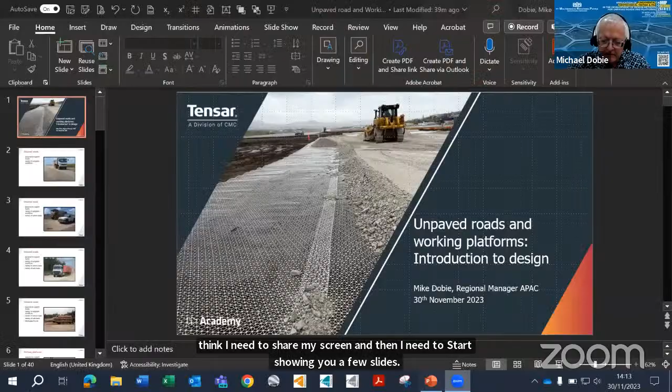I think I need to share my screen, and then I need to start showing you a few slides. So here we go. Good, I think everybody should be able to see this now, and I hope you can all hear me.

The topic today is unpaved roads and working platforms. These sound like they're quite similar, but of course, in terms of the way we design them and the way we regard them, there are quite big differences as well. So the question of design is an important one, and you've already heard from Rifa that my colleague Andrew Lees has been involved in developing new design methods, but I thought it would be a good idea just to introduce these particular forms of structure because they are quite special.

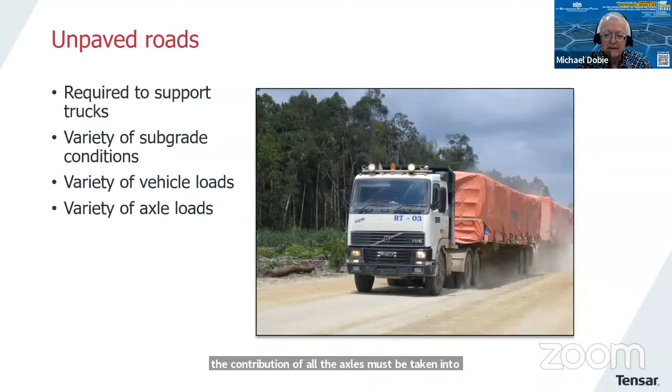So let's just have a look at a few unpaved roads. I think we all know what they are. They are roads built generally from gravels or aggregate materials, and they normally support trucks. Of course, they can support other loads as well. They can be built for a variety of subgrade conditions and also a variety of vehicle loads, from large trucks down to very small ones, and also a variety of axle loads. Here is a very long vehicle, so it has many axles, and the contribution of all the axles must be taken into account. A quite common problem here in Indonesia, of course, is overloaded trucks. I think there's one that is hugely overloaded with a lot of tree trunks on the back of it. So something else we need to think about in our designs.

Then working platforms, these are generally being designed to support various loads on a construction site. They're often considered to be temporary structures, but sometimes they do have to provide a function for much longer than that. And of course, they can be designed for a variety of subgrade conditions and also a variety of plant loads. You can see there an image where we have some piling rigs on a working platform in Germany. And here we have another picture of a particularly huge crane that's being supported also on a working platform. And this one, you can see how big the tracks are, but this is applying a pressure of 500 kilopascals maximum. So an absolutely massive load.

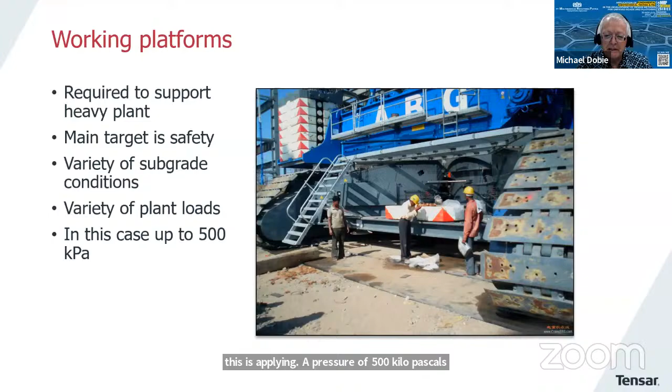To help provide information about both of these forms of design, Multibangun organized two design workshops. One, about three months ago, was for the design of unpaved roads. And then just two days ago, we had another workshop looking at the design of working platforms.

What I promised during both of these events was that the design methods, which I described briefly, would be explained in more detail. I was keen to get my colleague Andrew Lees to spend some time in a workshop, but sadly he can't come all the way from Cyprus today, so it's a webinar instead, and I'll ask Andrew to explain the background to the design methods we were using.

But before I ask Andrew to talk, I'd like to make a few points about some aspects of designing both forms of structure. First of all, what are we trying to achieve?

When it comes to an unpaved road, the load comes from a wheel and a certain number of passes of that wheel. There'll be a subgrade of some sort, an aggregate layer, and our target is to find out what the thickness of the layer is. We need this minimum thickness to provide the required design life.

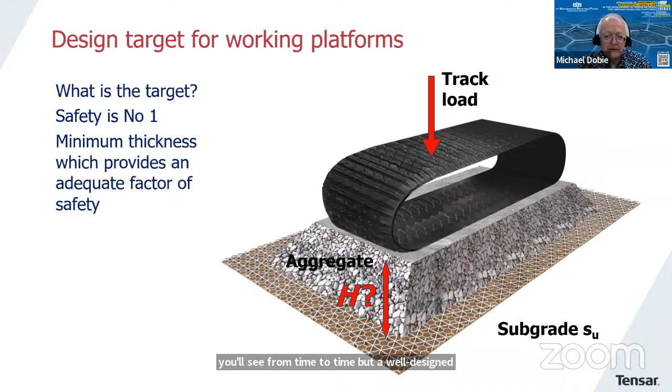But the targets are a bit different when it comes to working platforms. In fact, the number one target is safety — we need to make sure these bits of equipment don't fall over. Sadly, there are many reports of this happening from time to time, but a well-designed working platform is vital. So our target is to find the minimum thickness that still provides an adequate factor of safety.

So for any particular subgrade, we might need to design some form of access road for trucks, which would generally have a target given by a rut depth to be achieved. That might lead on to a working platform for a heavy crane, where the performance target would be to achieve a certain minimum safety factor. These are all part of the input into the design methods.

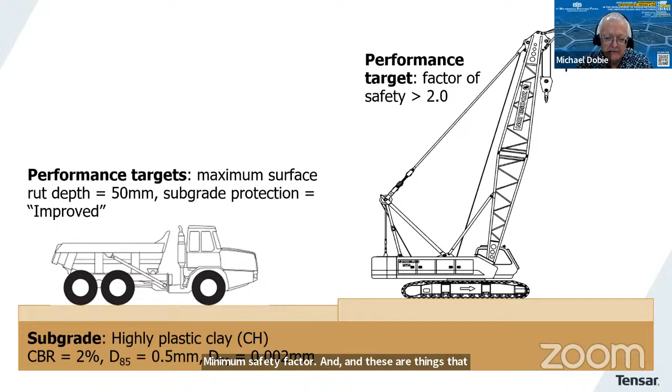During our workshops, we provided participants with examples which they designed themselves using our new software platform called Tensar Plus, which I'll show you briefly. You can see from the images, which are the same as the previous ones — in the first, three months ago, we designed an unpaved road, and in the second, just two days ago, we designed a working platform for a crane.

Here are the design methods — this one is called the Lees-Hahn method, also referred to as LARMS. I'll ask Andrew to explain further on that terminology. The platform was designed using the T-value method, and these are the two methods I'm keen for you to hear more about when Andrew talks shortly.

But before getting there, I thought I'd tell you a couple more things about the design of these structures. Here is a view of the Tensar Plus platform — newly developed, cloud-based software with a growing number of design methods, shown on the left-hand side, along with features of those methods. This is constantly under development.

If we look at the road design side, the first one in the list, we can see a number of methods, and the one we're interested in is the unpaved road method, which Andrew has developed over the last few years. Here's a view of the program — anyone who came to either workshop would have had a chance to use this simply by registering for access to the software. So that was the unpaved road design.

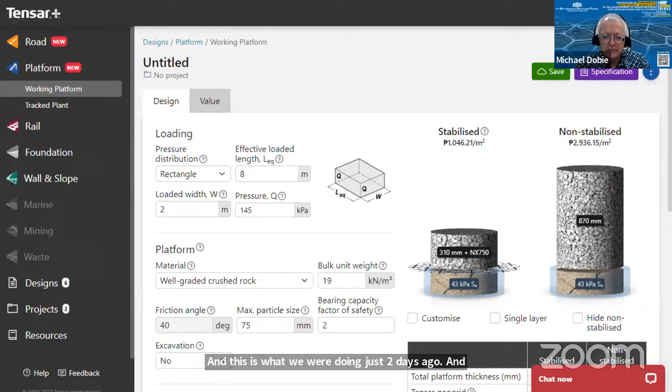In reality, design methods for both unpaved roads and working platforms have been available for many years, and many of them were highly empirical. By that, we mean people built roads, observed the behavior, and from that developed sufficient information to create a design method.

So this is what we call an empirical method. And likewise, the addition of the benefits of geogrids was also carried out empirically. So what I thought I would do is just have a look at the design method for unpaved roads.

Now this is one from a long time ago, so I think it'll be explained quite nicely. This was published in 1981, so that's 42 years ago, by Giroud and Noiray. Of course, J.P. Giroud is a very well-known name in the field of geosynthetics.

And this is a purely empirical method, and I thought I would just show you in a simple way just how empirical it is. So what we're trying to do is to design that granular layer. We want to find out the thickness H, and when it says little s, that's for stabilized with geogrid.

So the input would be the number of passes of what we call a standard axle, which has a weight of 80 kilonewtons. That's N75. You might say, well, what's the 75? Well, the 75 is the target rut depth that we're going to design for, 75 millimeters. So the subgrade is then represented by its CBR value in this particular design method.

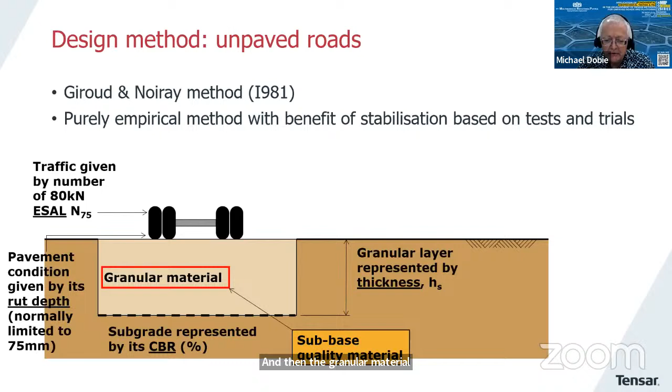And then the granular material would be assumed to be of what we would normally call a sub-base quality. So that's the various input parameters.

So having established those input parameters, we then simply go to this little equation, which gives us the thickness of the layer. And if you look in the equation, you can see N75, and you can see the CBR to the power of 0.63, and also FSN, which is a factor to take into account the stabilization effect of geogrid. And that gives us the thickness.

And when we see various numbers in it, like 190 and 0.63, those are constants which were derived when the method was created in an empirical way, so that they could fit the method to observed behavior. I thought we'd do that.

So I thought we would look at a particular piece of testing carried out in the UK a few years ago by the TRL, the Transport Research Laboratory in the south of England. And this was testing done by a machine that you can see there, the yellow machine, which basically runs a wheel up and down over a trial pavement.

And in this particular case, the pavements had a thickness of 300 millimeters of granular material of a sub-base quality, and the supporting subgrade was a soft clay. It had a CBR of 2%, it was actually a fairly highly plastic clay. And then the applied load was a 40 kilonewton load, because it's one end of a standard axle.

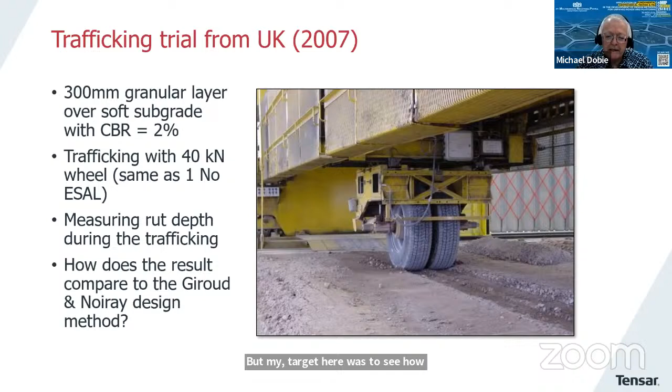And having completed any particular set of testing, we will then get a trafficking result. We'll look at it in a minute. But my target here was to see how does that compare to the prediction from the Giroud-Noiray design method. So let's have a look.

So here is a particular result of a trafficking trial test carried out by TRL. We have, in the horizontal direction on the axis, standard axles, ESALs, and it's logarithmic. It's sometimes easier to look at this data in a logarithmic scale. You can see the numbers going up to 100,000.

So there are two results there. Unfortunately, I'm afraid the slide has slightly changed the dimension of the legend. But the blue line is the stabilized case, and the green line is the non-stabilized case, so we call that a control where we don't have any geogrid. So that is what a typical trafficking result looks like, comparing a stabilized section to a control section.

So having got that information, I then went to the Giroud-Noiray method, and I calculated the number of standard axles required to get for a 300 millimeter pavement, that's the thickness that was used in the trials. And if you do that...

They look like this. So we have the 300 millimeter case, the red color is the control, and the black color would be the stabilized pavement according to their method. And you can see that the prediction, according to that formula we saw just now, is quite a lot below the actual performance.

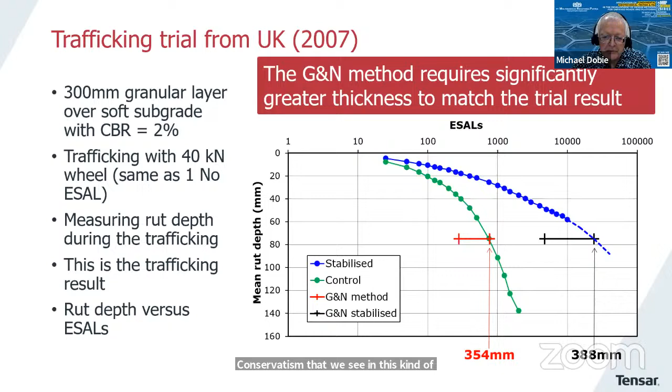It's a very nice indication of the relative conservatism that we see in this kind of design method. And then just quickly, I'd like to look also at the same thing for working platforms. Working platforms have generally been designed in the past using a load spread method. Let's see what I mean by that.

Back to this same kind of cross section, where we have the granular material in the light color and the rest is the subgrade. We apply some kind of load from a crane track maybe, and the load is in kilonewtons at this stage. We also have an undrained shear strength for the subgrade, and a target safety factor. So the parameters involved are quite a small number.

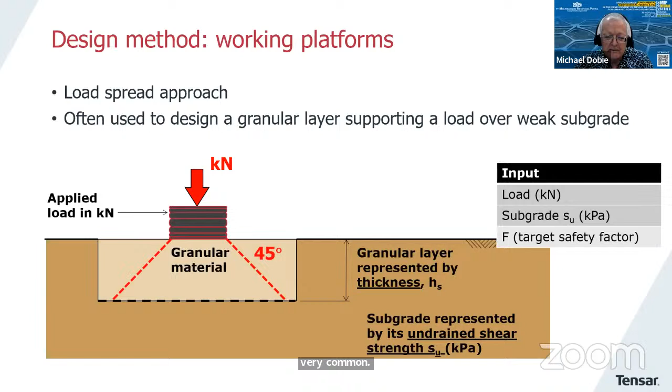We look at the design by using, in this case, a 45-degree load spread, which is very common for stabilized layers. Having done that, we calculate the pressure on the base, taking into account that load spread. Then we can also calculate the bearing resistance of the clay using a bearing capacity approach. We find a safety factor by simply dividing the bearing resistance by the applied pressure, and of course we want that to be above a certain target, maybe 2 or whatever it might be. So that's the load spread approach.

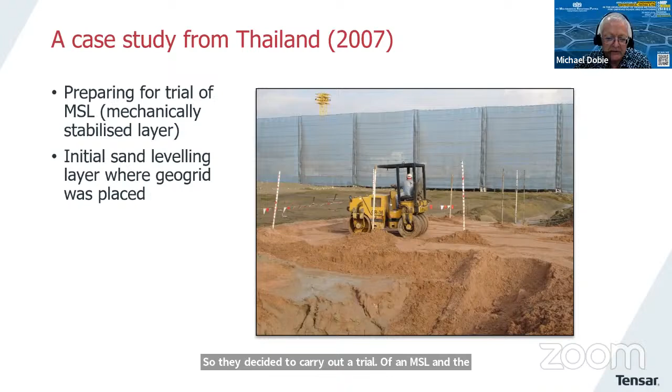So they decided to carry out a trial of an MSL, and the way they built it was like this: they started off with a sand layer, where they placed 2 layers of geogrid, and then finished it off with an aggregate layer, the slightly grayer color material you can see. Having built the working platform, they then loaded it with concrete slabs - these particular slabs weigh 5 tons each, with an area of 2 meters by 2 meters.

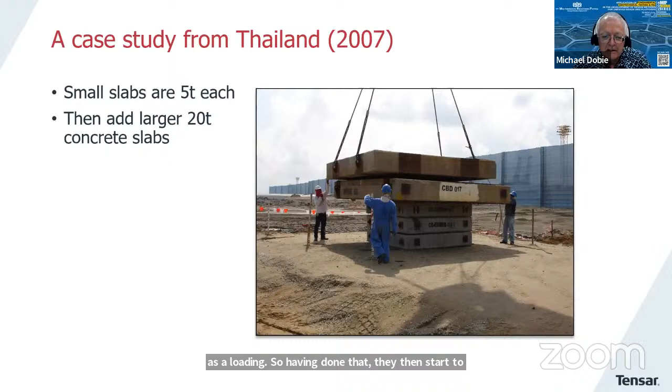Having done that, they then start to place more concrete slabs. Now these big ones weigh 20 tons each, and they're placed on top of the smaller ones, and they place a few more. At this stage, with 4 slabs there, you might notice we start to see a crack around the edge of the working platform area - that's as far as the geogrid extended. So you can see quite well a significantly wide platform developing as the load is applied.

So if we go to the full cross-section, it looks like this. We have all of the concrete slabs, which weigh in total 115 tons with a base area of 4 square meters. So we can very easily calculate a pressure, which is 290 kilopascals, which is very high.

Now, if we go down to the soft clay underneath, although we didn't have particularly good data, based on the information that we had, we estimated based on an undrained shear strength of about 7 kilopascals, that the bearing capacity would be 43.

Now, clearly it hasn't failed, so let's try analyzing this with a load spread approach. We'll use a 45-degree load spread. And if we do that, then we find that, quite interestingly, the applied pressure through that load spread is also predicted to be 43 kilopascals.

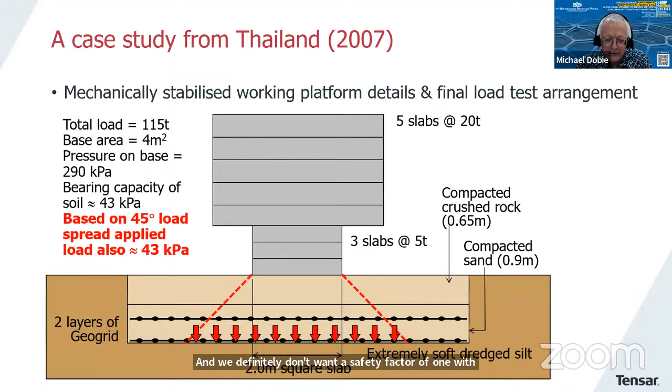So you might say, well, that's good, the bearing capacity is sufficient to support the load. But of course, if they're equal, that's going to imply a safety factor of 1. And we definitely don't want a safety factor of 1 with a working platform. So we can see that that approach has not worked very well. We want a safety factor of significantly above 1.

So we can see here that the working platform has provided far better performance than would be predicted using a 45-degree load spread. So I think I'm coming to the end of this little introduction, but there's a question here: can we improve on these design methods?

Now, again, what Andrew has done, he's taken up this question very seriously and decided that we definitely can. And so Andrew has worked away. I think Andrew has been a colleague of mine for almost 10 years, I think now. He can confirm that in a minute. But he set about trying to improve the situation with these design methods.

And he did it starting off with some very fundamental research. And then he used his very extensive experience of finite element analysis to help with the developments as well. And then he put this together to create methods for designing both working platforms and unpaved roads. And I'm not going to say any more about it because Andrew's going to tell you all about it very shortly. But it has been a really extraordinary development.

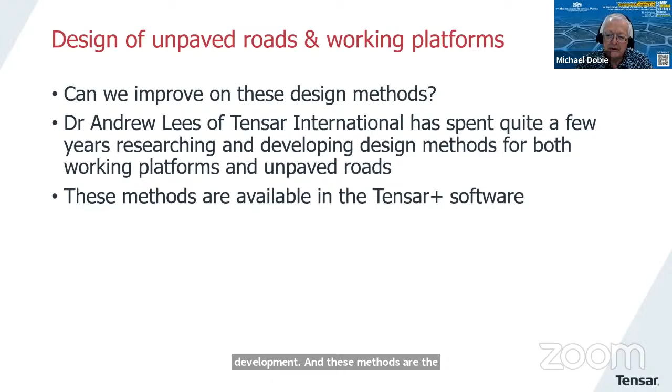And these methods are the ones available in Tensar Plus that we saw just now at the top of those 2 worked examples. And before I hand over to Andrew, I would just like to remind you that these design methods are based on the assumption that we have an aggregate and geogrid composite. The 2 materials work together to create what we call a mechanically stabilized layer.

And this is how it works. I'm sure Andrew is going to mention this again in a minute. But this is a very important starting point for this kind of approach to unpaved roads and working platforms and the design methods that we use.

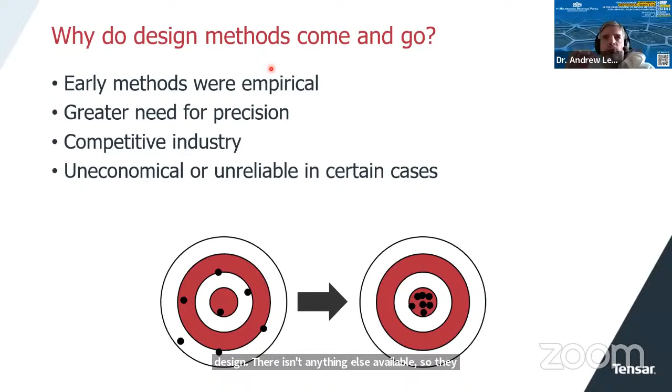Now, if we only have the empirical methods, what inevitably happens, because there's no other method available, is they start to get used in situations for which they are not applicable. When these design methods are published, there's normally a lot of limitations that are added to the method, saying it should only be applied in these cases. But often that gets ignored. People need to produce a design. There isn't anything else available, so they will continue to use these methods for situations where they were not intended.

Now, the risk of doing that, well, it's a bit like tightrope walking, as we see this monkey here. If you know what you're doing and you're very experienced at doing these designs, then maybe you'll get away with it. You'll be able to use these design methods and you'll understand the limitations and you can make adjustments. But if you are fairly new to these design methods, using these basic empirical methods, you could very easily get into trouble.

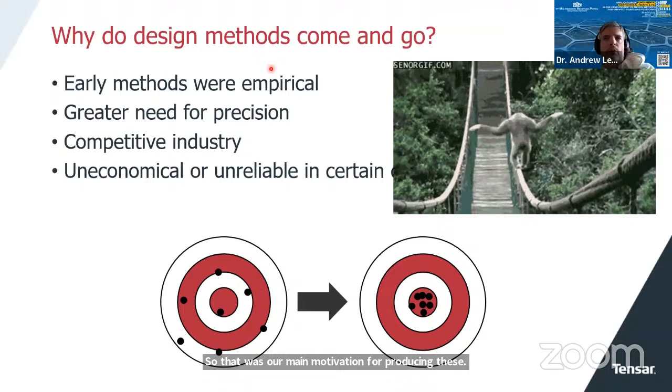And because these new design methods are going into our Tensar Plus design app for everybody to use, often for them to use without consulting with Tensar, we do not want to give people design methods that will get them into trouble. We need to give them design methods that are robust and they are going to work in a wide range of cases. So that was our main motivation for producing these more accurate, more reliable design methods.

So as promised, a little bit about applied mechanical stabilization. So you see that block of material there called an MSL, that's what we call a mechanically stabilized layer. So it is aggregate with stabilizing geogrid within it that improves the properties of that aggregate. So rather than geogrid reinforcement with a certain tensile strength plus an aggregate, we consider them as one composite material.

And we have been using the term MSL for many years, well over 10 years. But for a long time, it was a concept. We knew it existed, and we had done tests to show that there is a mechanical stabilization function, but we had no way of measuring it. So if anybody asked the question, how strong is it, or what are the mechanical properties of this material, we were not able to answer the question. That is until recently.

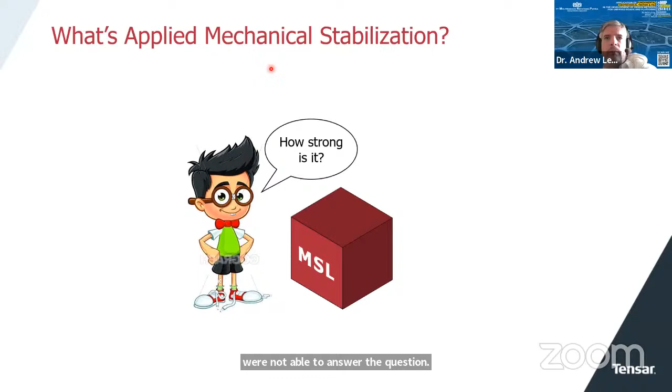What we have developed is a method to measure the mechanical properties of a mechanically stabilized layer. So we have built these very large triaxial rigs. So anybody that has studied soil mechanics as part of a civil engineering degree will be familiar with the triaxial test. In the university laboratory class, it will typically be about 76 millimeters high, the specimen, and 38 millimeters diameter.

This is the same test, but on a much bigger scale because the aggregates we are testing can be quite large, so you need a sufficient diameter to avoid particle size effects. Also, when we put in the geogrid, we need a sufficient number of apertures to get representative behavior. So we have a specimen 0.5 meter in diameter and 1 meter high.

It's so big you can actually hide behind it, as I'm demonstrating there. The aggregate is inside, and here's the rubber membrane, just like a standard triaxial test, but there's no cell around it because it's too big. So we apply the confining stress by applying a vacuum to the specimen, and you can see the rubber membrane being pushed into the aggregate by atmospheric pressure.

So that's the background to applied mechanical stabilization. Let's see now how we are applying that to the two design methods we are going to cover today: one for working platforms, which I'm going to do now, and the next one for unpaved roads. I'm doing platforms first because in unpaved roads you will see we are using the platform design method, so it's logical to cover that first.

To develop what we call the T-value design method, we looked back at existing literature and found centrifuge model tests performed on circular and strip footings on an aggregate layer, actually sand in this case, overlying a clay subgrade. In the model tests, they used different H values, so different thicknesses of the granular layer, different widths of loading, and different strengths of subgrades.

There were no geogrids in these tests, so we were just deriving a completely new design method without geogrid that would allow us later to incorporate the benefits of stabilizing geogrid.

These results from the model tests show the bearing capacity, QU, that was obtained, and we normalized it by QS, which is the surface bearing capacity of the subgrade. If there was no granular layer and the foundation was on top of the subgrade, then QU would be the same as QS. Hence, when H equals 0, the ratio is 1.

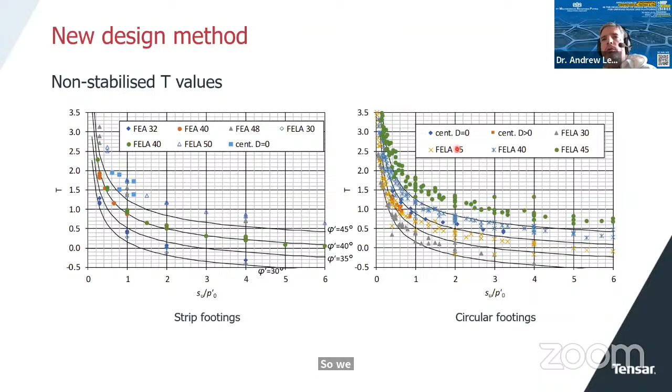So the T value increases with the strength of the granular layer, and decreases as the ratio of the strength of the two layers increases. We derived that for strip footings, and we also looked at numerical studies with circular footings, and found that the same 4 lines provided a lower bound to the circular footing. So we can use the same lines for circular and strip footings, which means we could use the same lines for all rectangular footings with B over L ratios in between.

So that method was peer-reviewed and published in the ICE proceedings. Again, if you want to read more information about that design method, you just need to obtain a copy of that paper.

Now, how do we introduce the benefit of mechanical stabilization? That's really why we develop these new design methods, is to show more accurately the benefit of mechanical stabilization.

So here we have the same curve that we saw just now. For a phi value of 45 degrees, this is how the T value depends on the undrained shear strength SU of the subgrade. Here is a curve that we had derived a few years ago for our TriAx product with crushed rock aggregate. But now we have a new product, Tensar Interax.

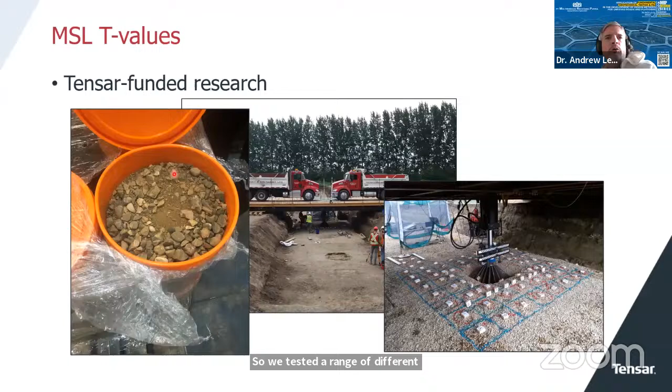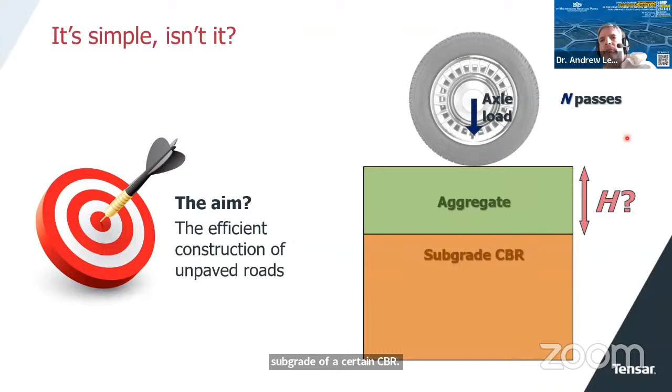So the Giroud-Han design method did take that into account by assuming a circular contact area and that the applied stress equals the tire inflation pressure. But we thought, is that really the case? Is it circular? And the tire inflation pressure on modern trucks can be much higher than the bearing capacity of the unbound aggregate. So how could it possibly be equal to the tire inflation pressure?

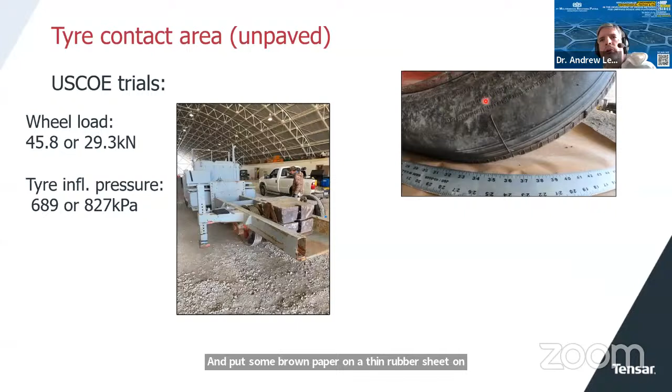So we did some investigation. At the US Army Corps of Engineers test facility, we used the loading truck they have here with a dual tire, similar to the TRL facility, but this one is actually driven by a truck. They can change the weights as well as the inflation pressure. So we did some experiments with 2 different wheel loads and 2 different inflation pressures, and put some brown paper on a thin rubber sheet on the unbound aggregate. We drove the wheel onto the brown paper, sprayed paint around the base, and measured the contact area.

What we found is that the contact area is rectangular, not circular. The contact width equals the tire width. It's the length that varies. But actually, it depended more on the tire load than it did on the inflation pressure.

So the existing design methods such as Giroud-Han are completely wrong with the tire contact stress. Right at the beginning of the calculation, they're already 50% out. So as we thought, because of the compressibility and some yield in the unbound aggregate, the contact area actually gets bigger and the contact stress reduces. So the traditional method of predicting contact area by the tire inflation pressure can underestimate the contact area or overestimate the contact stress by a significant amount, although it works reasonably well on a rigid surface - it's just not on an unbound aggregate.

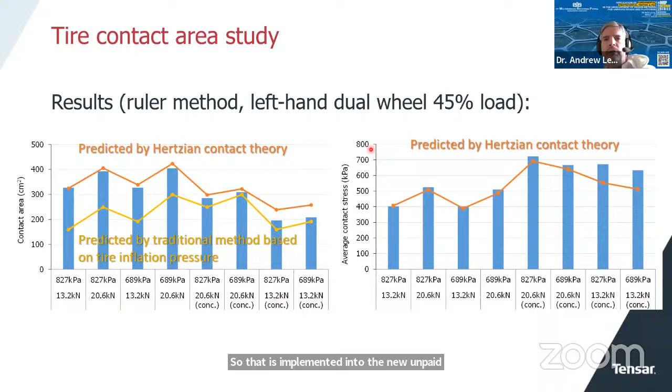We developed a new method based on Hertzian contact theory - the contact between two objects, dependent on the stiffness of the two objects. By doing that, we got a much more accurate method of predicting the contact stress. That is implemented into the new unpaved roads design method. The big advantage is that if you get the fundamentals right, then you can apply the method across a wide range of cases - the complete opposite to empirical methods that suit only the particular test conditions that were studied.

If you get the fundamentals right, you can apply this on a wide range of tire sizes, right from the heavy haul mining truck to a small pickup truck. We can even consider explicitly the difference between single tires and dual tires, as you see here, and consider a wide range of axle loads. So this one new design method is used both for heavy haul mining roads, but also for more lightly loaded or road-going trucks on unpaved roads.

But that introduces some new input parameters. The tire width is needed - that's on the side of all tires. You also need the radius as well. Now, you may not always have that information, so Tensar Plus helps you out, gives you some typical values. But if you do know these values, you can input them into the design.

So this new way of calculating the tire contact area was recently published at the Canadian Geotechnical Conference just a couple of months ago, so that is available to get more information about that method of calculating tire contact area. Again, that's on my ResearchGate profile.

Now, the main purpose of the design method is to predict rut depth. That is normally how performance is specified.

Now, our method has a completely new way of calculating the permanent rut. It does it in two stages. It calculates a theoretical rut on the first pass, and then it adds the accumulation of rutting on subsequent passes. You'll see why that is shortly.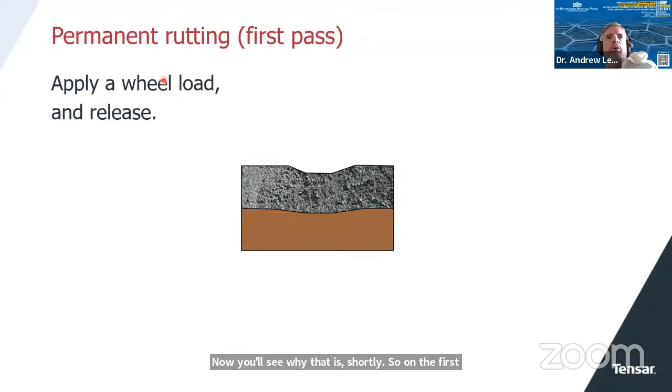So on the first pass, you apply a wheel load and release, and you are left with a small permanent wheel path settlement, SP, at n equals 1. That is made up of a subgrade permanent settlement, ST, and perhaps some deformation of the base layer, the aggregate, subbase permanent compression, SG. These are all theoretical values. This is not something you would try to measure in practice, just one truck and then measure it, but you'll see how the calculation works in this way.

Now, a new feature is we're calculating separately the subgrade settlement and the aggregate deformation. One good reason to do that is because after the first pass, you would expect deformations to accumulate at different rates in these very different soils. So it's useful to calculate them separately, but it also gives us the subgrade rut, and we'll look at the advantages of that later.

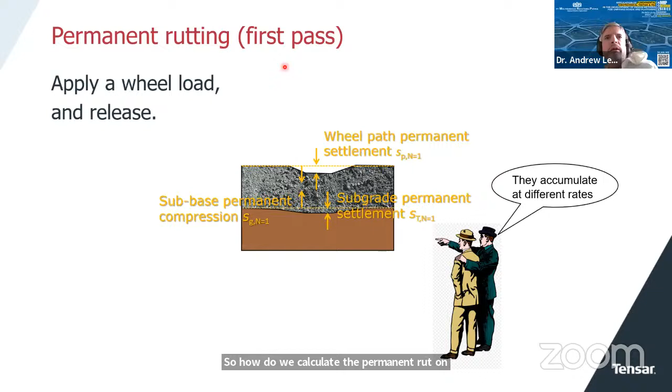So how do we calculate the permanent rut on the first pass? To explain that, I'm going to go back to the plate load test that you saw earlier from the testing in Canada. So we get a load settlement curve that looks like that. Here's a closer look at the graph. Now we get to failure about here. So we don't actually need all that plateau there. Let's zoom in to that part of the curve.

So we apply a pressure and we get to failure here. This is the failure pressure, the bearing capacity of that plate. Now, if we were to unload the plate, let's say at 100, 200, and 300 kilopascals, we would come down a steeper unload-reload line, because this is just elastic deformation, and we would have a permanent settlement at each of these values. You see how it's growing more rapidly.

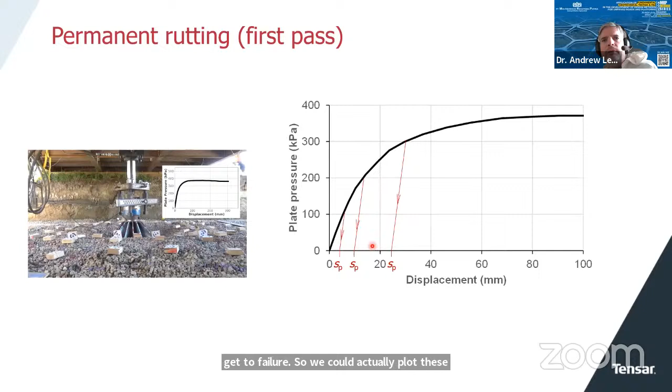So the gap between these gets bigger and bigger until we get to failure. So we could actually plot these permanent settlement values against the applied plate pressure, and we would get this red line here, similar in shape to the total one. This one includes the elastic, and the gap between these represents the elastic rebound settlement.

So we're interested in this relationship between permanent settlement and applied pressure. Now, if this is the failure line here, let's normalize the results. Over here, I've got something called a mobilization factor. It is the applied stress divided by the stress at failure, so when it reaches failure, you have a value of 1. I've also normalized the settlement by the plate width. So now we have a curve that can be applied across a range of different cases with different sized plates and different strengths of subgrade.

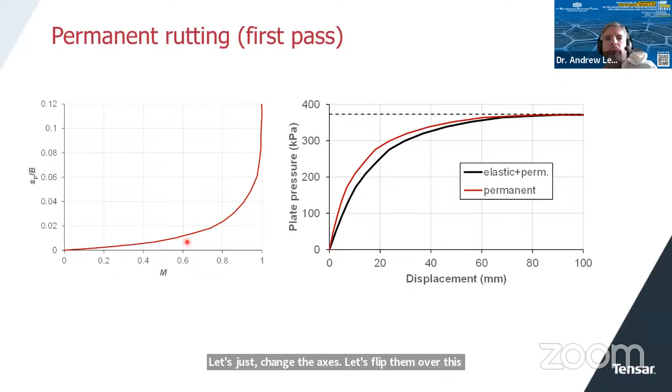Let's just change the axes. Let's flip them over this way. This is how this sort of curve is normally presented. That could be represented very well by a hyperbolic curve. So the settlement at any mobilization ratio could be predicted using a curve such as this.

So the permanent settlement depends on the mobilization of bearing capacity. And when the mobilization gets to 1, we have a mechanism, so this value would become infinite. But at typical values we would expect in service, we will be down here somewhere. This allows us to predict the permanent settlement of this plate for any mobilization ratio.

So we derive curves like this to predict the permanent settlement under a wheel load. So let's say we're trying to predict the subgrade rut - how much is this subgrade going to settle? Well, we calculate the bearing capacity using the t-value method, exactly the same method that we use for platform design that you saw earlier on, so you see the consistency between different applications. We calculate the bearing capacity for the width of the tire, so we need to know the width of the tire and the dimensions of the contact area.

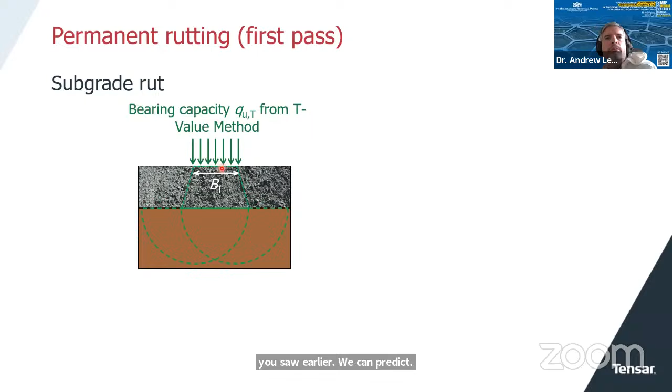Using the method you saw earlier, we can predict what pressure is needed to be applied to make this subgrade fail. Then we calculate the actual pressure that is applied using the tire contact area method that you saw earlier. So we have pressure applied and we have bearing capacity. We calculate the ratio of the two, and that will be our mobilization factor, MT - pressure applied divided by bearing capacity.

And then we derive a hyperbolic equation that you see here, with some numbers that have been calibrated from a number of trafficking trials and plate load tests. From this curve, once you know the MT value, you can read off the permanent settlement of the subgrade divided by the width of loading. So this is the settlement on the first pass.

As I said, it's been derived from a literature review of trafficking and cyclic plate load tests. Now, Giroud-Han uses a similar approach to this, but it only has a linear relationship between the mobilization and the settlement. That's why it has a narrow field of application. You can only use it for a narrow range of rut depths. But with this curve, we can go all the way down to very small rut depths if we like.

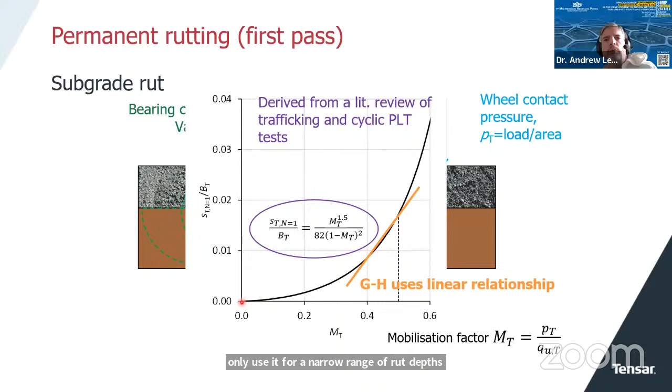Now, we're calculating subgrade rut and aggregate deformation separately. So what about the deformation of the base layer? Well, it's a very similar approach. We calculate the bearing capacity using a normal bearing capacity calculation method, such as Terzaghi, for surface bearing capacity entirely within the granular layer. So we have the width of the tire. We calculate the actual pressure that's applied. If it's a dual tire, we only look at one tire at a time for the aggregate deformation.

Again, we calculate the mobilization factor, and from another curve appropriate for this aggregate, we get a relationship between the mobilization and the aggregate deformation on the first pass. So we've derived this in a similar way to the other curve.

Giroud-Han and other methods do not consider aggregate deformation at all. Again, for that reason, they have a narrow field of application. The Giroud-Han method should only be used for a certain ratio of CBRs. But again, people ignore that and they continue to use it for other cases. But this method works even if the subgrade CBR is very high. It will calculate all the deformation just in the granular layer.

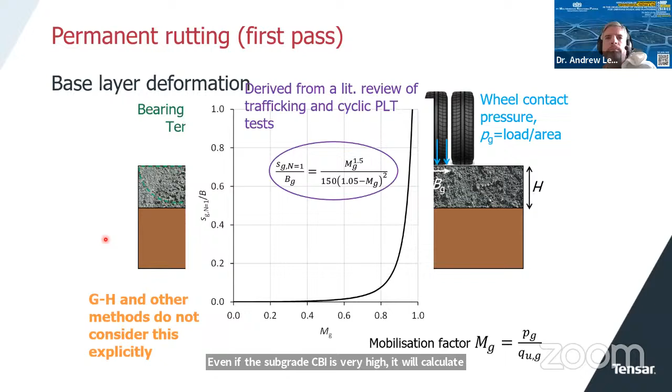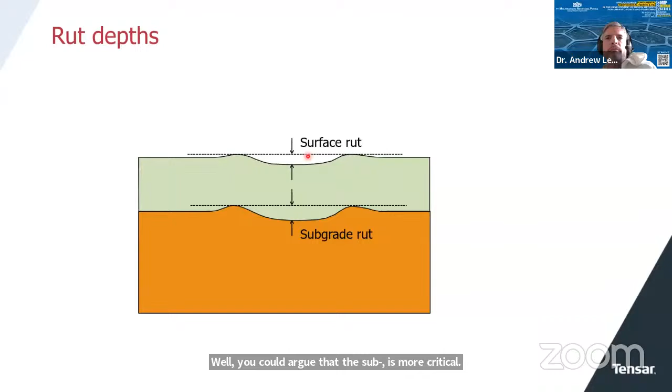As I mentioned earlier, this method calculates the subgrade rut as well as the surface rut. And you might think, well, why do I need the subgrade rut? Well, you could argue that the subgrade rut is more critical than the surface rut. Yes, more serious. Why is that? Well, if you did get a surface rut, it's relatively straightforward to repair. You can just level it off.

But the subgrade rut, first of all, you won't even know it's there. Secondly, if you want to repair it, it's much more difficult. You've got to remove the aggregate in order to repair the subgrade rut.

Why is a subgrade rut a problem? Well, if you get some rain, it'll percolate easily through the aggregate and it will pond on top of a low permeability subgrade. And it will stay there and slowly infiltrate into the subgrade and cause it to soften, and it will have a lower CBR, which means that the rutting will then accumulate even faster. So you'll get a rapid degradation of the road. So it's very good to avoid.

And when you go into Tensar Plus, you will see that you have options to improve the subgrade protection level so that it keeps the subgrade rut small to avoid this problem.

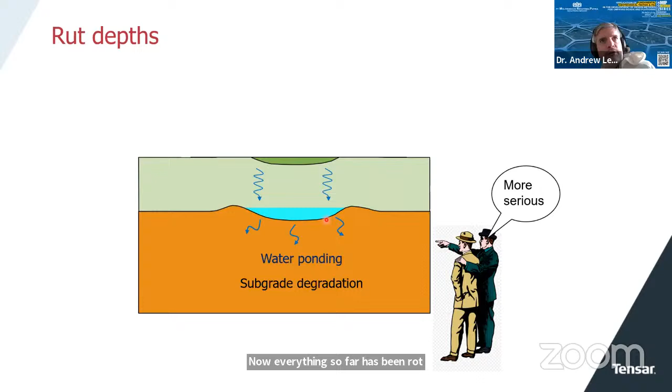Now, everything so far has been rut depth on the first loading. We need to add the accumulation of rutting. So a quick look at rutting accumulation, or deformation modes. This is a typical static or monotonic test of failure, could be in a triaxial cell. Deviatoric stress against axial strain, you get to a failure stress QF, following a curve like this. But imagine we did cyclic testing. There's an important stress level called the threshold stress.

If we did cyclic tests, repeating the load up and down to a stress that's well below the static failure but above the threshold stress, you will see that the accumulation of deformation may not slow down. It may accelerate, and you get something called ratcheting deformation because it's stepping up and up and up, and it never stops and will eventually reach failure.

So we want to avoid this in a road design. We want to keep the stress level below the threshold stress, because if we keep it below the threshold stress, we can do cycles, and it doesn't matter how many cycles we do, the accumulation of deformation is always slowing down. So these loops get closer and closer together, and you may reach a condition called the shakedown condition, where you get no further accumulation of deformation. This pattern of deformation is called shakedown deformation.

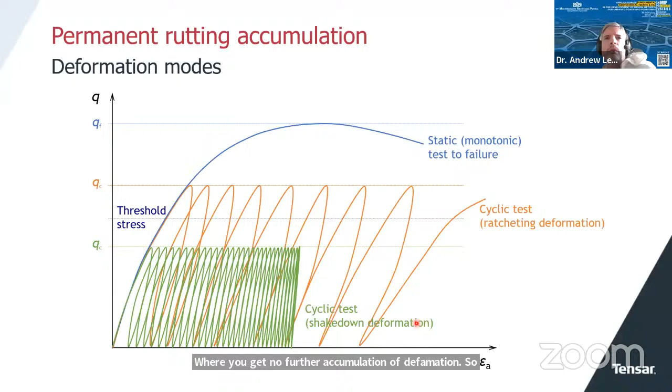So we want our roads to follow this shakedown pattern, and we need a way to predict shakedown deformation. There are many curves in the literature to do this. Usually they are different for cohesive or fine-grained materials and different for aggregates and coarse materials. Very few predict the actual shakedown to a plateau. We wanted to introduce a new method that covers all the soil types.

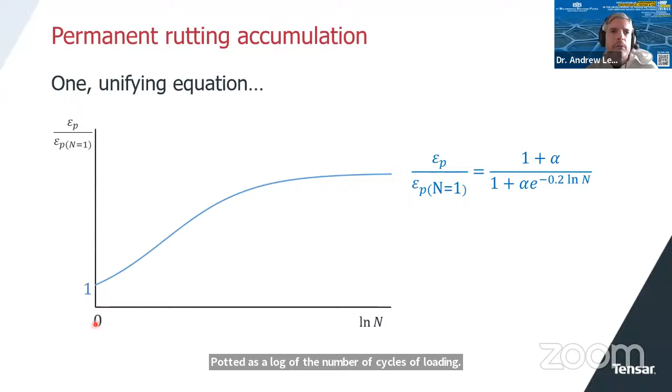We plotted that against the number of cycles of loading, plotted as a log of the number of cycles of loading. So when n equals 1, the log of n equals 0, and this value equals 1, because on the first pass, the plastic strain equals the plastic strain on the first pass. So they all start at number 1, and then they accumulate in this pattern, eventually reaching a plateau when they get to shakedown. That can be represented by this curve, or this equation of this curve.

It has a single input parameter, alpha, and alpha has a physical meaning. It is the distance from here to here, which is the permanent strain needed to get to the shakedown condition. And we assume that the maximum slope occurs halfway between these two points, and that happens at a number of cycles equivalent to alpha raised to the power 5.

Now, these assumptions have kept the equation very simple, a single input parameter. But we found that we were able to characterize the shakedown deformation accumulation in a whole range of soils just from one parameter. That's represented here.

So this is the same graph that you saw before, but we've plotted curves that we have derived from a range of soils, all the way from a highly plastic clay down to a sand, a road base, and a rail ballast.

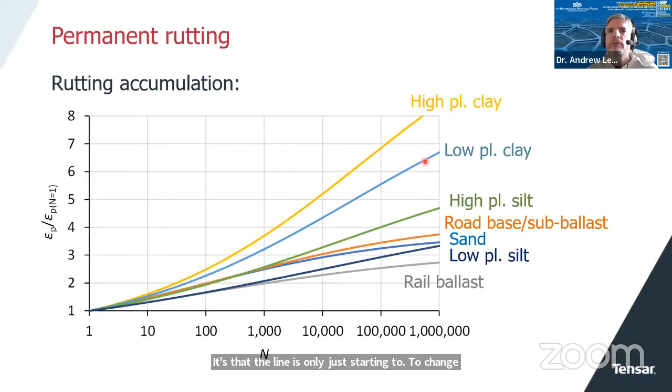But the advantage of this characterization method is that once tested, we can design any aggregate with any geogrid on any subgrade. We can characterize both the road base material and the subgrade all by the same approach. And when we add geogrid to the aggregate, we can test it in our large triaxial and still derive these curves.

So this is, you calculate the rut depth on the first cycle. You will use these same curves to calculate the accumulation of rut depth normalized by the rut depth on the first pass, and you can do it to a very high number of cycles. So that's how the rut depth calculation is made.

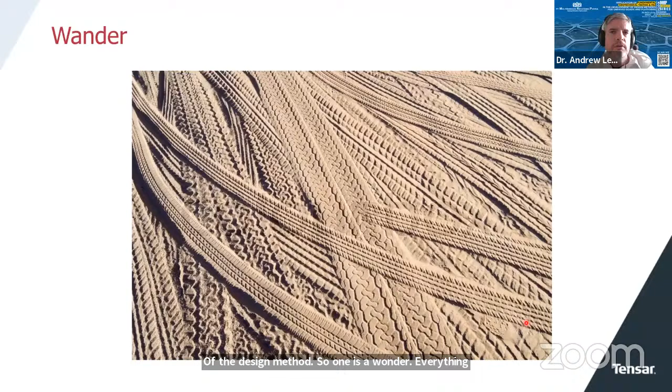I'm just going to go quickly over a few additional features of the design method. One is wander. Everything we've looked at so far is considered channelized traffic, so it assumes the wheel goes on the same path every time. But in reality, of course, that doesn't happen. If you watch vehicles going along an unpaved road, you will see a range of paths, but they will tend to cluster around a mean path and follow a normal distribution such as this.

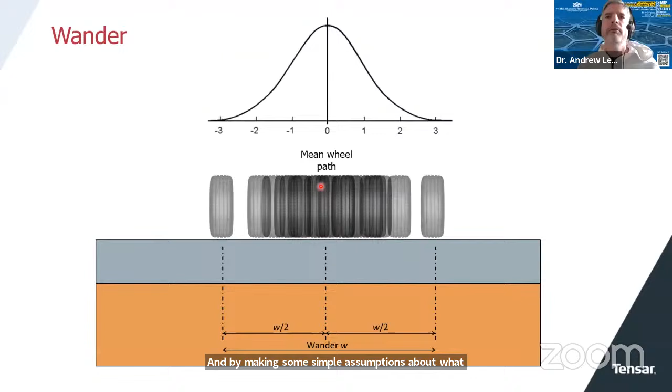So we can define wander as the full width of wheel paths that we see, and for practical purposes that's plus or minus 3 standard deviations on a normal distribution. By making some simple assumptions about what happens to the rut depth when wheels go on paths adjacent to the mean - so when the wheel passes along here, maybe the rut depth will actually reverse a small amount when a wheel crosses over here - we did a parametric study using the normal distribution, and we came up with a correction to the number of passes based on the wander and the tire width.

So we have this feature in Tensar Plus. You will notice that it makes a small difference to outputs, so you need a very large wander to make a significant difference to the design. That's because even if you only have 20% of the number of actual passes, the majority of the deformation happens in the first few passes. So it doesn't make a big difference, but if you do have a large one, you will be able to make a bit more of a saving on the thickness of the aggregate.

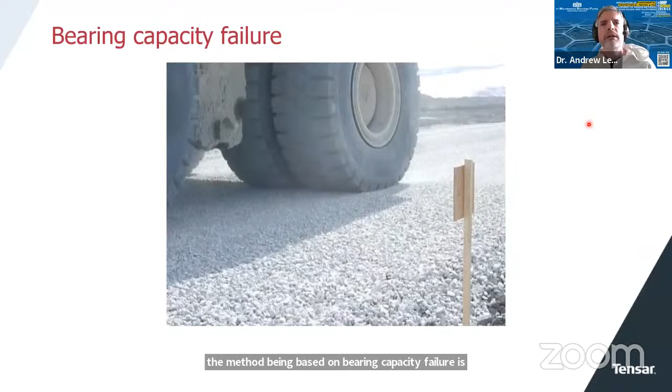Now, another feature of the design method that is actually a completely separate calculation - because based on feedback, when the design method was being developed, we asked designers how often do they have a problem with excessive rut depths. And the answers we got were sometimes we do, but actually we also often have a problem with the waterbed effect.

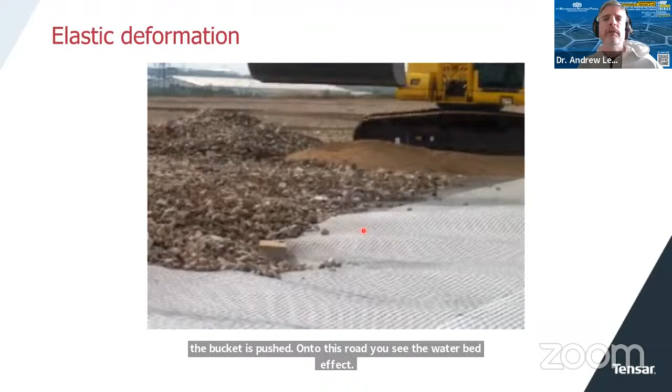So if I play this video and you watch what happens when the bucket is pushed onto this road, you see the waterbed effect. This is caused when the soil beneath liquefies. So if it's a silty soil and it's saturated, due to loading or vibratory compaction, you can cause its liquefaction. Let's see if we can play that again. You get this effect, but you notice it's elastic - it bounces back immediately. So this is not rut depth, this is a completely different phenomenon.

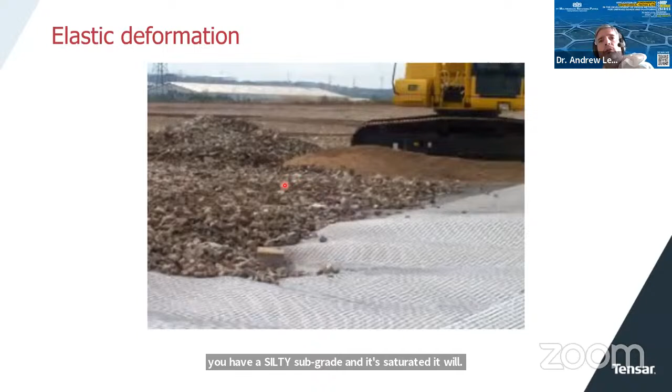So if you look in Tensar Plus, there is a part that will, if you have a silty subgrade and it's saturated, increase the thickness of the aggregate layer to keep the elastic deformation below a certain limit. And that is using an elastic deformation function that I don't have time to show you now, but I've just put this here so that you are aware that it exists.

Now, everything I've shown you so far about unpaved roads does not mention GeoGrid. Just like the t-value method, we've developed a completely new design method that anybody can use, even if they're not using GeoGrid. It's a much more powerful design method than the existing methods. But of course, the reason we developed it is so that we can incorporate mechanical stabilization in an accurate way and make savings in design. So how do we introduce mechanical stabilization?

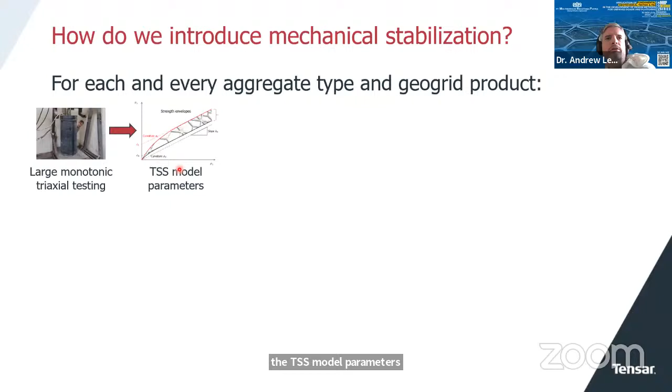For every aggregate type and GeoGrid product, we do our large monotonic triaxial testing to derive the TSS model parameters, that's the mechanical stabilization measurement. That goes into FEA models, and we run parametric studies of bearing capacity, which allows us to derive the t-value relationships you saw earlier. We do our full-scale validation, giving us parameters for platform design as well as unpaved roads design based on bearing capacity.

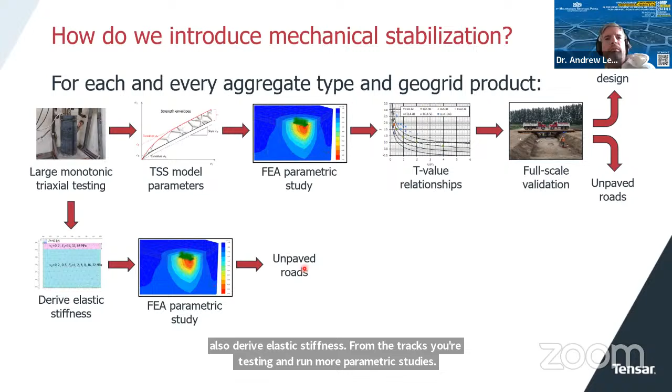We also derive elastic stiffness from the triaxial testing and run more parametric studies to account for the waterbed effect in unpaved roads. We also do cyclic triaxial testing so we can derive deformation accumulation curves used in unpaved roads to predict rut depth accumulation. So it's a long process.

So to use our design methods with GeoGrid, you need to go through all these steps. And not only that, we need to do some full-scale validation of the unpaved roads design method.

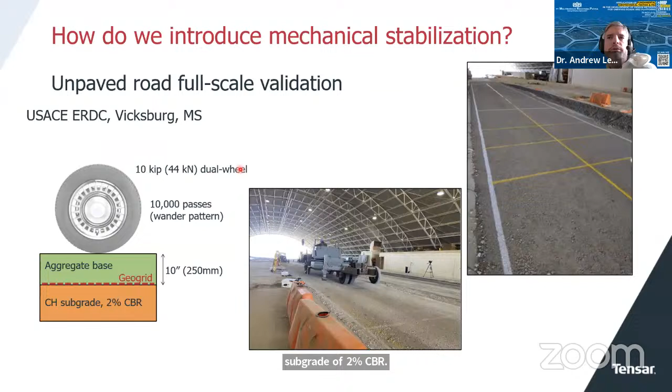That was done at the US Army Corps of Engineers test facility. You saw this truck earlier in the tire contact area study, where we did a full trial on an unpaved road with Tensar Interax, with a 44 kilonewton dual wheel running 10,000 passes with a wander pattern on an aggregate base of 250 millimeter thickness with Interax GeoGrid on a plastic clay subgrade of 2% CBR. We used those results to validate the design method and the input parameters.

Now, I showed you some publications. There are 2 more publications undergoing peer review for the unpaved roads method, so they're not available yet. In the meantime, if you go to Tensar Plus and the resources section, you can download documents that describe what I've just been through. Here it is, the Leeds Approach to Applied Mechanical Stabilization, that's LAMS, and this is the unpaved roads method, so it describes that.

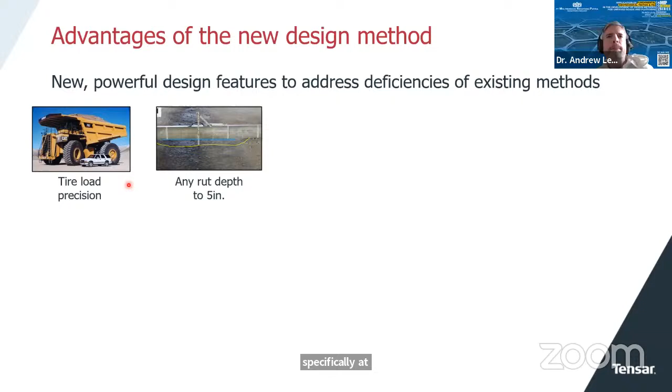To summarize the advantages of the new unpaved roads design method: we now have tire load precision, so we can look at a wide range of vehicles, even very specifically at unusual vehicles when we have the tire dimensions. We can look at any rut depth up to 5 inches, that's 125 millimeters, but also very small rut depths if you want higher performance, allowing you to design to pass a proof roll.

I don't know whether you ever had that requirement, but in some countries they run a certain vehicle over a road and measure the small rut depth to check that the road has been constructed adequately. So we can even design for those small rut depths using the new approach.

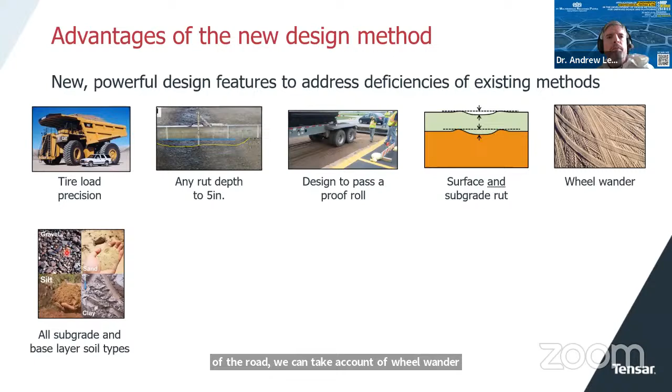We predict surface and subgrade rut to improve the life of the road, and we can take account of wheel wander. The approach we've taken using fundamental soil mechanics means we can adapt this design method for any subgrade soil and any aggregate type. So we're already looking at lower quality aggregates with Tensar InterAx to construct roads from. It also takes account of elastic and resilient deformation to avoid the waterbed effect.

We've got excellent industry expert and academic feedback. In fact, we've co-authored the papers with prominent academics in this field. And it all came from the fundamentals - how do we characterize the mechanically stabilized layer?

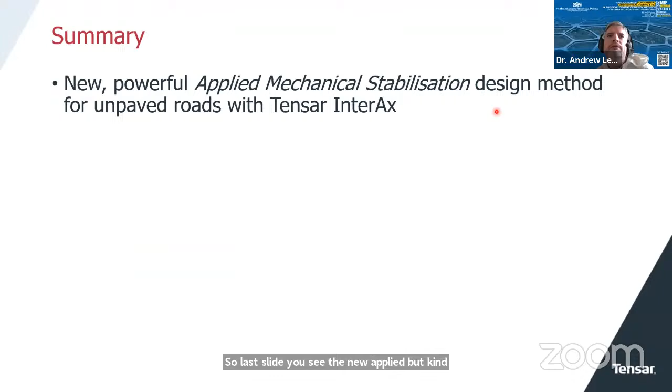So, last slide: you see the new applied mechanical stabilization design methods for unpaved roads with Tensar InterAx as well as platforms. We've updated the t-value method.

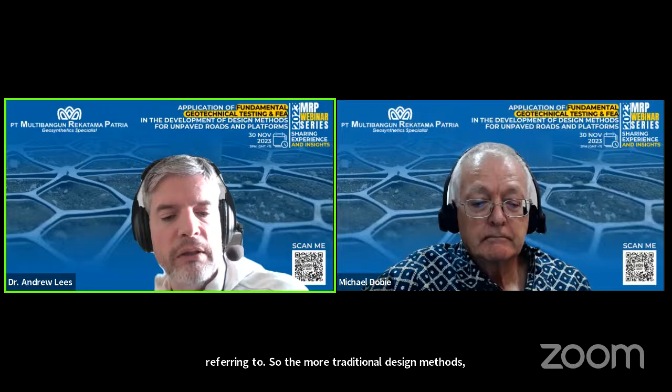So that's what we're working on. We're testing all these different aggregate types because our goal is always to be more accurate and to make our designs very efficient. But as we get more and more accurate, we need to be more and more specific about what aggregates we are actually referring to. The more traditional, empirical design methods had a lot of conservatism in them, so we could be more relaxed about the aggregate types we were talking about. But as the design methods get more precise, we need to be more precise about what materials we are referring to in our designs.

Thank you, Andrew. I'd have to say that Gerald came back with a bit more explanation. He's actually from the Philippines - that explains a few things. But he was actually talking about ground, or I guess crushed boulders. He then asks, what is the best mixture of aggregate sizes, fine and coarse, to get the best performance for fill? So they seem to be very much related. But do you have any final comments for Gerald? Because we do have a couple more questions after that.

Okay, well, the better the grading, generally, the better performing it is. So if you are going to blend materials, you need to get as good a grading as you can.

There are different ways of characterizing a grading, as referred to in various specifications in different countries. So if we're talking about crushed boulders, we don't want them to get too big, because it's difficult to work with large materials when you're trying to create a certain thickness of roadway. And with our geogrid products as well, if you look at the aperture size, they are suited to particles of a certain size or range of sizes, so we don't want them to get too big.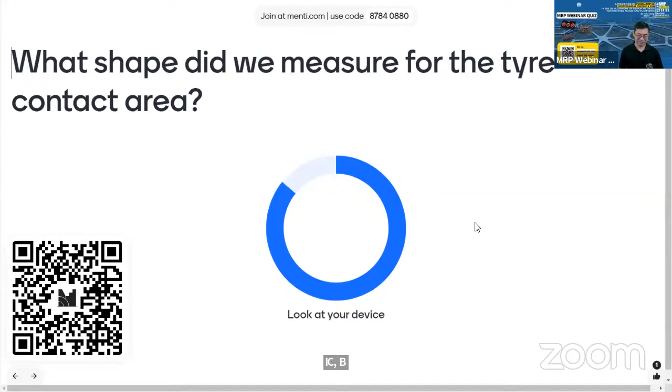What shape did we measure for the tyre contact area? Circular, rectangular, or triangular? Pertama, kedua, atau ketiga Bapak Ibu?

Ini yang nyimak nih gampang nih Bapak Ibu, pasti tahu. Pada bengong berarti pada nggak merhatiin. Vote-nya lama, kalau benar tapi lama nggak masuk poinnya Bapak Ibu, itu di bawah, harus cepat. Kalau bingung langsung tembak aja Bapak Ibu ya.

Kita lihat jawaban yang benar. Jawaban yang benar adalah yang kedua ya, rectangular Bapak Ibu.

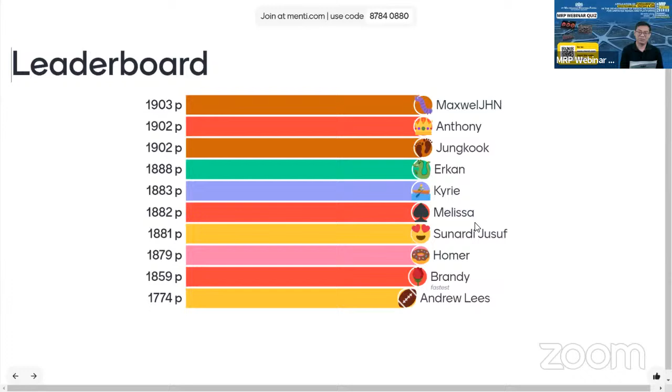Kita lihat skor perolehan sementara nih Bapak Ibu. Wih, poinnya Bapak Maxwell yang tertinggi. Wah, Pak Anthony mana? Tenggelam, Pak.

Oke, lanjut pertanyaan ketiga ya, jawab dengan cepat dan benar Bapak Ibu. What is the correct order of these deformation modes from smallest to largest permanent deformations?

Yang pertama, shake down, ratcheting, elastic. Yang kedua, ratcheting, shake down, elastic. Atau yang ketiga, elastic, shake down, ratcheting. Itu urutannya yang mana Bapak Ibu? Yang benar, the correct order, urutan yang benar yang mana?

Tadi kalau ngedengerin Pak Andrew pasti tahu nih. Kalau yang nggak tahu udah tembak aja Bapak Ibu. Jawab, moga-moga bener ya. Ini kalau lama begini ada yang mikir pasti nih detiknya. Kalau udah vote semua biasanya langsung ini nih. Oke, mana yang benar Bapak Ibu? Urutannya. Oke, udah vote semua.

Jawabannya adalah yang ketiga Bapak Ibu ya, elastic, shake down, dan ratcheting ya Bapak Ibu. Oke Bapak Ibu.

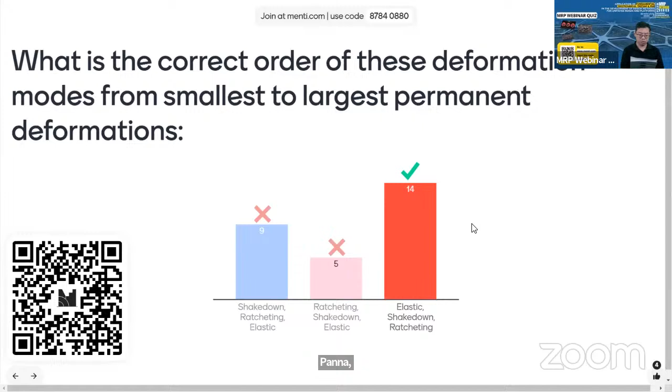Sudah pertanyaan terakhir, kita lihat siapa pemenang pertama, kedua, dan ketiganya. Oke, siapa yang beruntung kali ini? Wih, Bapak Maxwell, selamat ya, Pak Maxwell JHN, Maxwell John ya. Yang kedua, Jungkook, sama yang ketiga, Ibu Melissa. Selamat untuk para pemenang, jangan lupa klaimnya ke panitia ya.